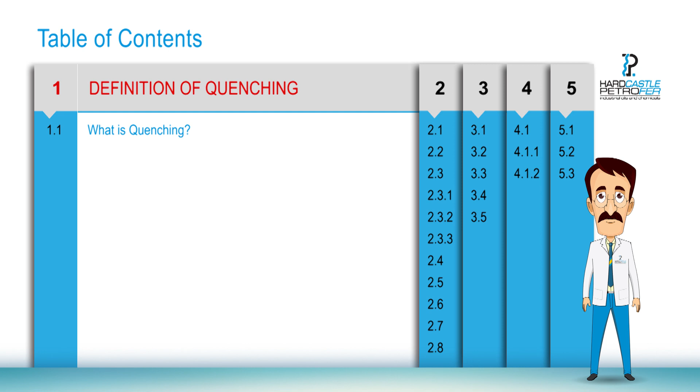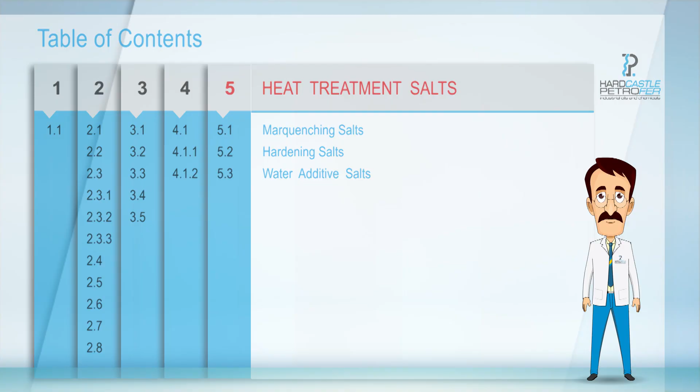Definition of quenching. General information on quenchants. Quenching oils. Water-miscible quenching media. And heat treatment salts. These are the topics we will be covering in this tutorial. Let's go ahead and get started.

Let's begin with the first topic, definition of quenching. First and foremost, let's understand what is quenching. Quenching is rapid cooling of steel from austenitizing temperature, which is around 830 degrees Celsius to 910 degrees Celsius, by immersing in a quenchant, which can be oil, polymer solution, gas, water, or even salt.

By quenching, we can increase the strength of the steel. Various properties like hardness, yield strength, impact value can be achieved by proper quenching. That was a quick brief on quenching, hope it was informative to start with. In the following topic, we will get into details about the quenchants. So let us proceed further and understand more.

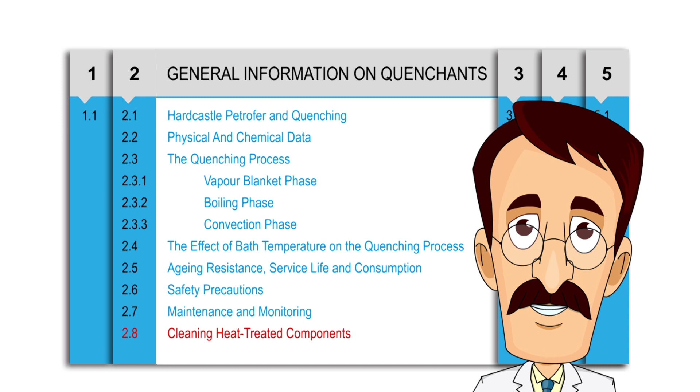Now we begin with the first subtopic under general information on quenchants, Hardcastle Petrofer and quenching. The metallurgical properties of heat-treated steel components are primarily dependent on the following factors: austenitizing conditions, hardenability of the steel, and quenching process used.

Well, to begin with austenitizing conditions, the austenitizing conditions like hardening temperature and furnace atmosphere.

Hardenability of the steel, which mainly depends on the chemistry or grade of steel and percentage of alloying elements.

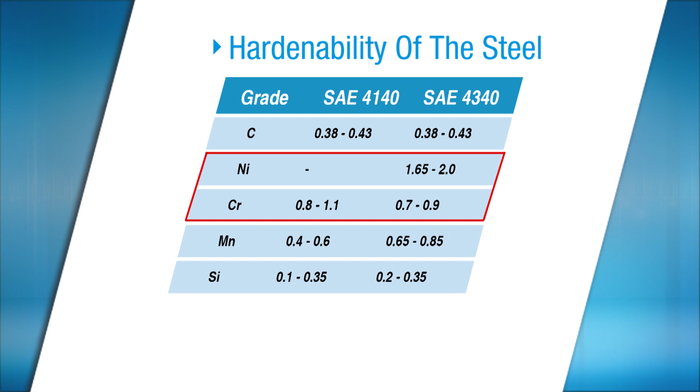Quenching process. The quenching process used, whether carburizing, through hardening, or induction hardening.

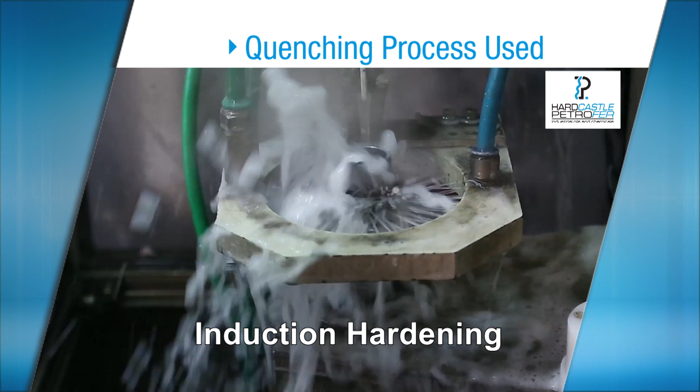Modern heat treatment processes are continually making new demands on quenching fluids, and Hardcastle Petrofer's extensive development programs ensure that our product technology is more than capable of meeting these new requirements. These programs are designed not only to improve the technical properties of our quenchants, but also to provide economic and environmental benefits.

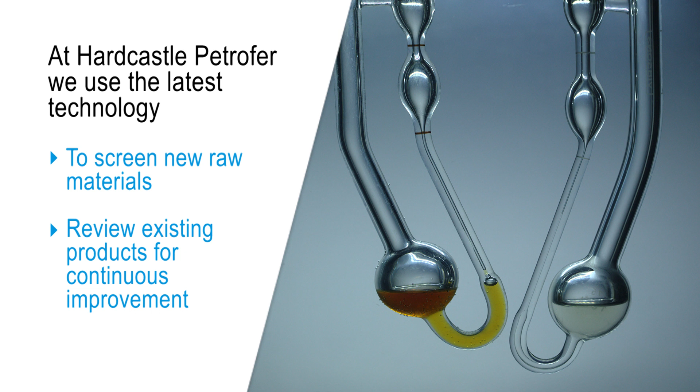At Hardcastle Petrofer, we use the latest technology. We are constantly screening new raw materials for their suitability for use in quenchants, and our existing product range is reviewed continually to ensure that the best available technology is used.

We also collaborate with equipment manufacturers and our valued customers for developing new products according to their specific needs. By using this approach, backed by our in-house capability and know-how, we are able to offer the most comprehensive range of quenchants available today.

Comprehensive range of available quenchants: medium-speed quenching oils, accelerated quenching oils, bright quenching oils, hot quenching oils, vacuum quenching oils, water-based polymer quenchants, molten salt baths, and customized quenching oils.

By having our own extensive development facilities and a complete range of products, we can ensure that the best solution is delivered to meet customers' needs. Many factors are important in choosing the most suitable quenchants.

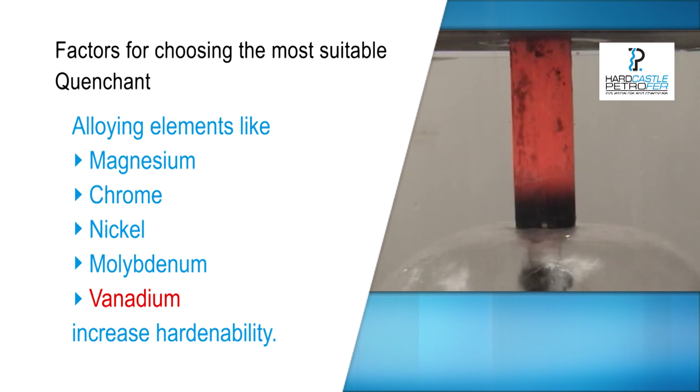Hardenability of steel refers to the capacity of hardening or hardening depth in a steel rather than the maximum attainable hardness value. Alloying elements like magnesium, chrome, nickel, molybdenum, vanadium increase hardenability. Alloy steels have significantly higher hardenability as compared to plain carbon steels. Hardenability of any steel is evaluated by the Jominy end quench test.

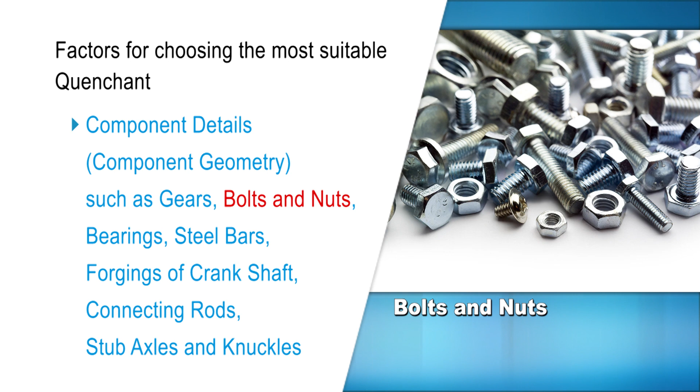Component details, that is, component shape or geometry such as gears, bolts and nuts, bearings, steel bars, forgings of crankshaft, connecting rods, stub axles and knuckles. Metallurgical properties required like hardness, case depth, yield strength, impact values, etc.

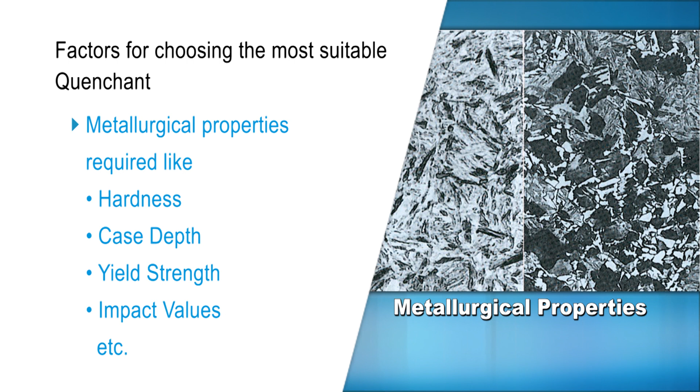Furnace equipment: bogie furnace, pit furnace, and sealed quench furnace. Post-treatment: washing machine. Environmental issues.

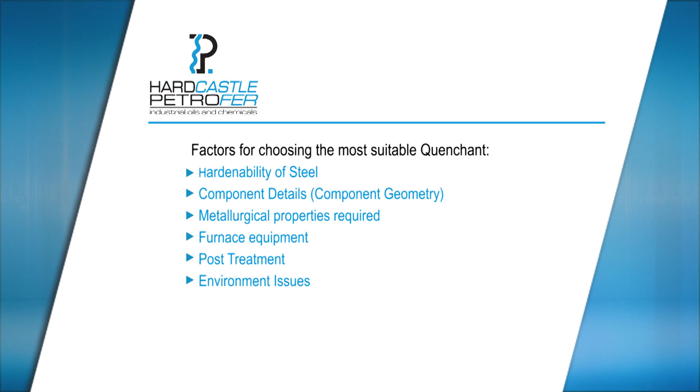As many variables often have to be considered, it is important that a comprehensive knowledge of the quenchant is available, that is: physical and chemical data, quenching properties, thermal and aging stability, and physiological and ecological properties.

Now we shall move on to discuss one of the most important aspects of selection of suitable quenchants: physical and chemical data.

Important data for identification of quenching oils typically are viscosity, flash point, and specific gravity.

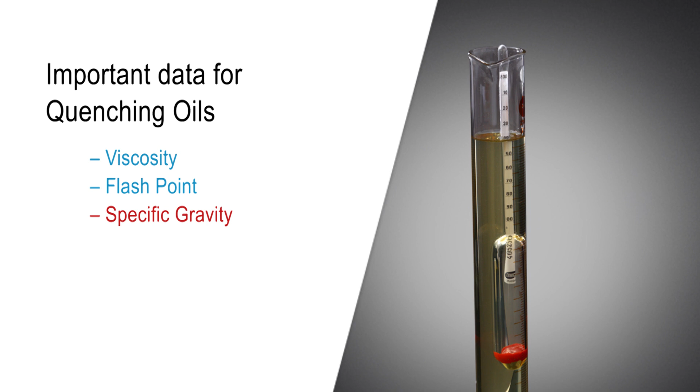Let's understand the relation of viscosity and oil bath temperature. By maintaining the correct bath temperature, one can achieve optimum working viscosity of the quenching oil. When the quenchant temperature is too low, it can result in high viscosity, reduced agitation, and increased drag-out loss. When the quenchant temperature becomes too high, it can cause unnecessary smoke formation as well as increased fire hazard.

Let's refer to the graph of viscosity versus application temperature of the quenching oils. Quenching oil temperature should ensure optimal viscosity, generally in the range of 5 to 15 centistokes. The red line indicates low viscosity accelerated quenching oil. The blue line indicates a medium fast speed quenching oil having high vaporization stability. And the yellow line indicates hot quenching oils.

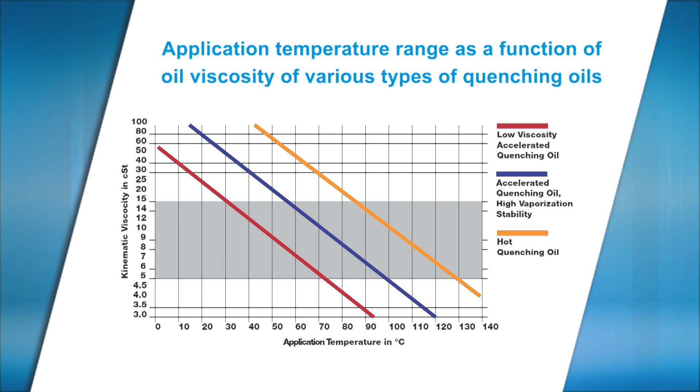Importance of product flashpoint: it limits the application temperature range. Typically, the application temperature upper limit should be approximately 60 degrees Celsius below the oil's flashpoint.

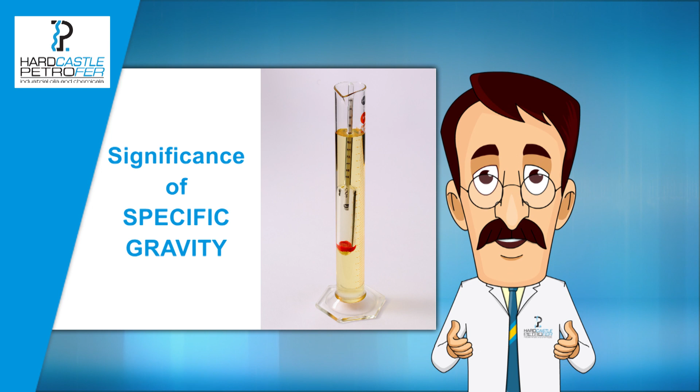Specific gravity of a pure mineral oil can give an indication of its origin. However, it can be significantly modified by additives, and therefore the quality of a quenching oil cannot be determined on the basis of its specific gravity.

Let's catch up on the next topic, the quenching process.

The quenching process: a quenchant is characterized primarily by its quenching properties, and these are difficult to describe in words. Descriptions such as severe quench or mild quench are of little use in technological era.

The quenching process or cooling rates can, however, be studied using test probes such as nickel and nickel alloy probes using cylinders 12.5 mm diameter as per ISO 9950, or alternatively steel probes 3 to 80 mm diameter as per Meinhardt method, or a silver ball 20 mm diameter as per MPI silver ball method, or silver cylinders 8 or 16 mm diameter as per SETIM method.

We use the IVF quenchometer for cooling curve analysis, which has an Inconel probe of 12.5 mm diameter. Usually, the cooling effect of a quenchant is shown by charting temperature versus time, or the rate of cooling versus temperature.

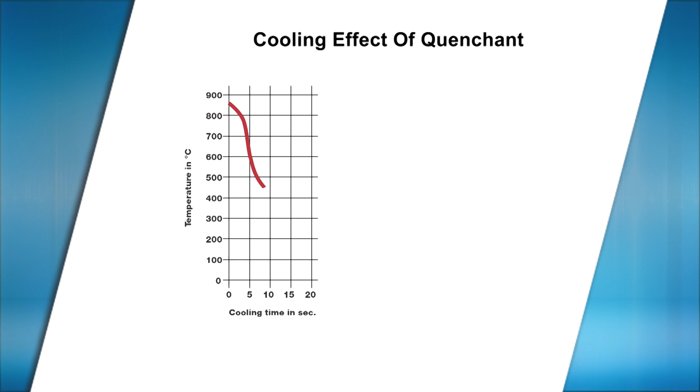We now move on to the study of the three phases of quenching. A vapor blanket is formed on the component immediately after immersion in the quenchant. This vapor layer acts as an insulator because of its low thermal conductivity, and therefore the cooling rate in this phase is low. The duration of this phase depends essentially upon the quenchant's composition.

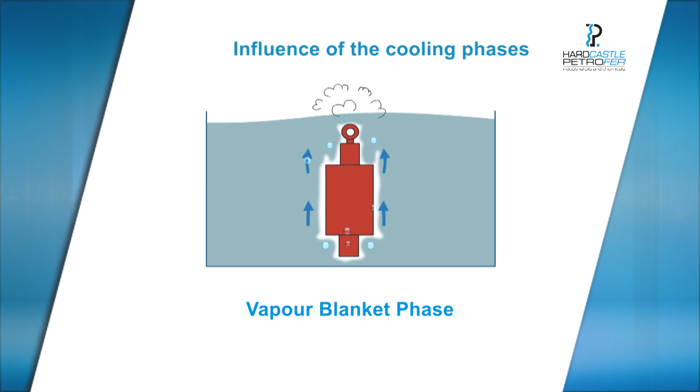Our accelerated quenching oils have a very short vapor blanket phase, and in this respect are superior to most other quenching oils. A short vapor blanket phase is not only necessary to avoid undesirable pre-transformation microstructures, but it also ensures a steady lowering of temperature on the entire surface of the component, thus minimizing thermal stress and distortion.

After a period of time, depending upon the quenchant and component geometry, the vapor blanket starts to break down and the boiling phase begins. Heat is conducted away at an increasing rate by evaporation of the quenchant at the component surface.

The rate of cooling reaches its maximum, and as the surface temperature falls, boiling becomes weaker and finally ceases.

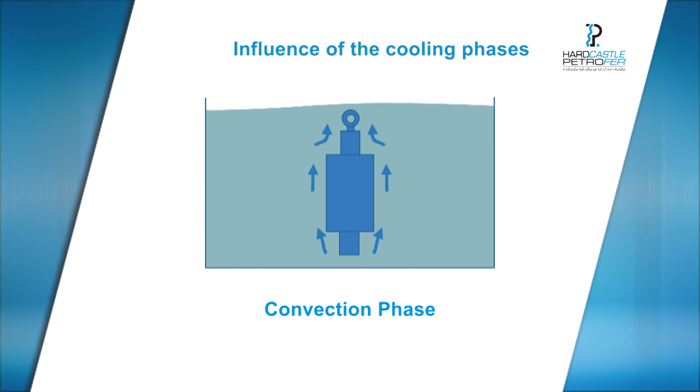In the last phase of cooling, heat is conducted away only by convection. Consequently, cooling in this phase can be significantly affected by circulation of the quenchant. A high degree of cooling in the convection phase will result in deeper hardening of the component.

For evaluation of the cooling curves, the following points are therefore important: duration of the vapor blanket phase, temperature range of the boiling phase, the cooling rate during the convection phase, and the temperature at which it begins.

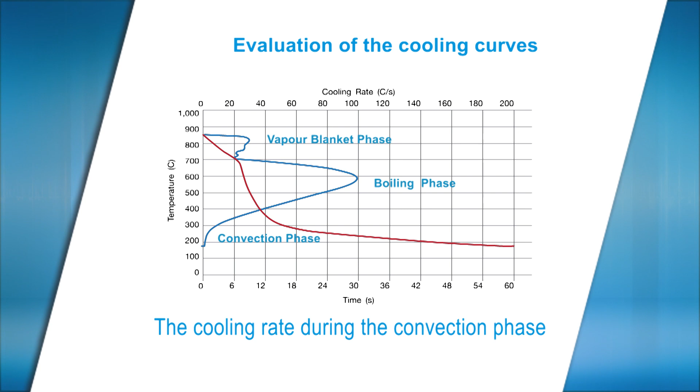A shorter vapor phase gives fast and homogeneous cooling of the entire surface of the workpiece. Wide boiling phase gives good heat extraction in large diameter components. Cooling in the convection phase can be influenced by circulation of the quenchants.

Significance of maximum cooling rate: the maximum cooling rate can be used to compare various quenchants. The relation of the steep slope of the temperature versus time curve, and its position in relation to the time-temperature transformation diagram, is of utmost importance.

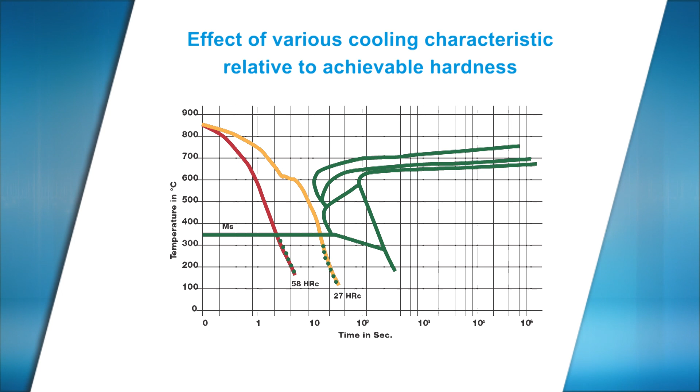In the following topic, we will learn the effect of bath temperature on the quenching process.

However, aqueous or water-based quenchants are affected significantly by bath temperature. This is caused by the much smaller difference between the working temperature range and the boiling range of aqueous solutions in comparison with oils. Water boils at about 100 degrees Celsius, whereas oils boil from about 300 degrees Celsius upward. Consequently, when aqueous media are being used, bath temperatures must be kept constant within relatively narrow limits.

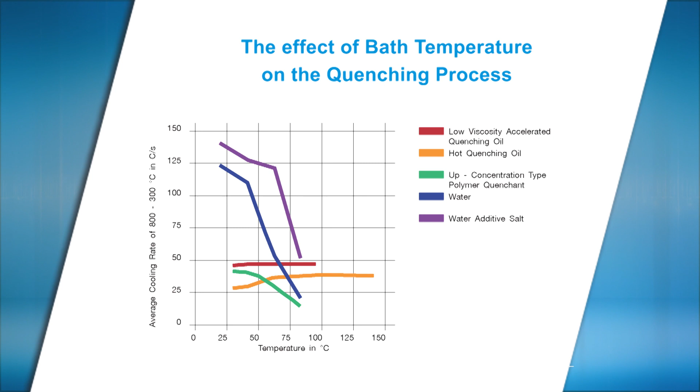The graph shows the influence of bath temperature on the quenching performance of several quenching fluids. The average cooling rate of water, additive salt in water, and up-concentration polymer quenchant reduces as bath temperature increases. Whereas, in the case of low-viscosity accelerated quenching oil and hot quenching oil, the average cooling rate remains almost the same throughout its operating temperature range.

Let us once again review the influence of bath temperature on the quenching properties. For quenching oils, the bath temperature has insignificant influence when operated within its recommended viscosity range. For polymer solutions, bath temperatures have a considerable impact on quenching properties. This can be used advantageously when quenching tool or die steels, and slow cooling is required. While quenching in water, the temperature of water bath has a distinct effect on the quenching characteristics.

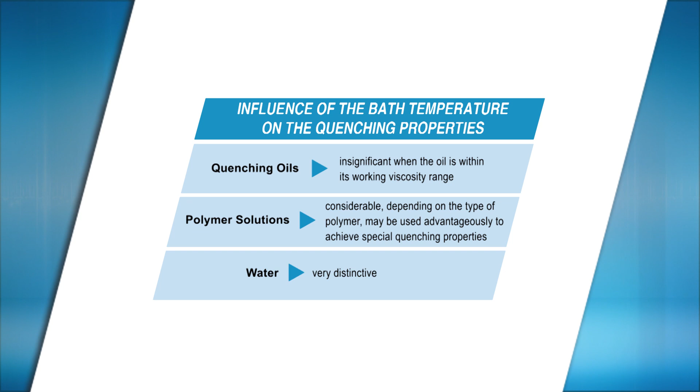The control of bath temperature plays a significant role in ensuring uniform quenching characteristics throughout the quenching cycle. For control of the bath temperature, we can consider heat balance calculation as shown, where the formula indicates heat input from the metal is transferred to the quenchant. It can be used to design the cooling arrangement required to maintain a constant temperature.

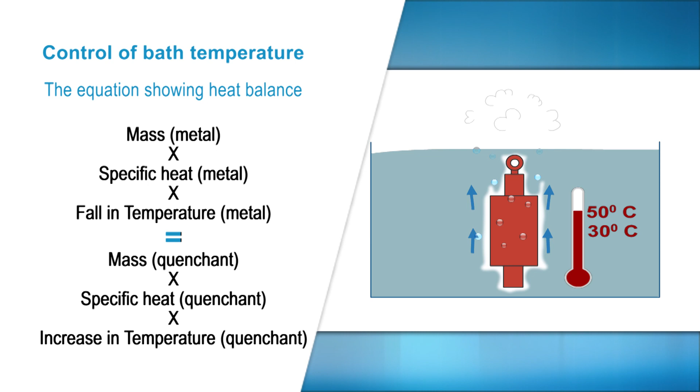The temperature of the quenching oil must be maintained within the recommended range, as it can significantly influence the life of the oil, drag-out loss, and distortion of components. Various types of heat exchangers like shell and tube, plate type, forced air-cooled can be used for control of temperature.

Now let's move on to a discussion on the aging resistance, service life, and consumption of quenchants in the process.

Resistance to evaporation has a considerable effect on consumption and thus on oil bath economics. Experience has shown that on batch quenching, probably more oil is lost through evaporation than through drag out by the components.

Aging resistance is, however, of the greatest importance in determining the economics of any oil bath. Oils having poor oxidation resistance will form a sludge after a short period in use, and this normally results in deposits in the cooler, the coldest place in the quenching bath. Ultimately, discoloration appears on the surface of the treated components, which is either difficult or impossible to remove. At this stage, replacement of the oils is unavoidable.

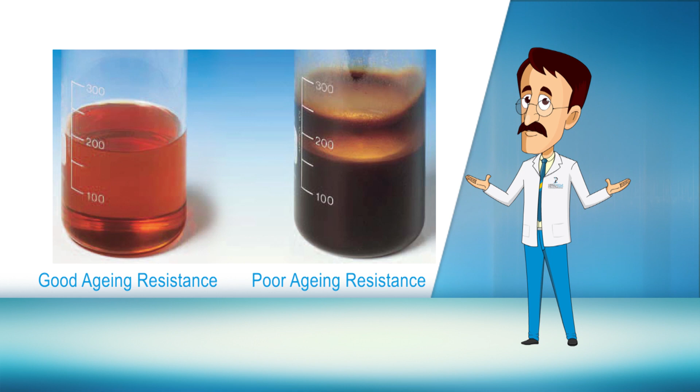Now, let us discuss the advantages of using a quenchant having stable parameters. The high evaporation stability of oil helps in reduction of smoke and also the consumption due to lower evaporation. The good oxidation stability of the oil provides better service life and helps reduce sludge formation. The oils having high thermal stability significantly reduce smoke and help retain typical quenching properties for a longer period.

Several important points need to be observed when using an oil bath in order to achieve the optimum working conditions. In order to keep the thermal loading within limits and also to avoid severe variations in the working temperature of the bath, a relationship between the weight of the batch or hourly throughput of the furnace and the volume of quenchant must be maintained.

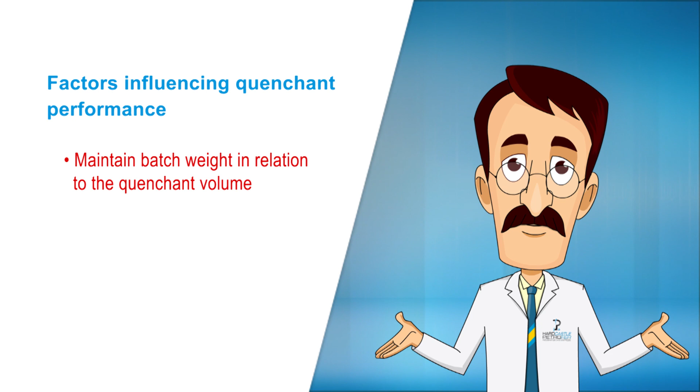Consequently, the following values can be used as a guide to the relationship between the weight of quenching oil and the gross weight of the batch to be quenched.

Open oil baths 10:1. Sealed furnaces 10:1 to 7:1. Hot quenching oils used at their highest temperatures 10:1 to 15:1.

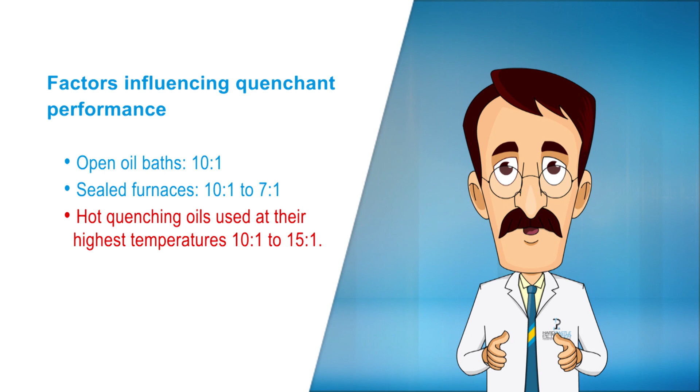These values can also be used where quenching of small batches at short intervals takes place, and the hourly throughput of steel is then used in the calculation.

Now we see the effect of loading pattern. This relationship depends upon the conditions of use of the oil and upon the size of the components. Larger components, which take longer to cool, cause a lower thermal loading to the oil bath than tightly packed batches of small components which give off their heat rapidly.

The cooling and heating elements of the heat exchanger should not be made of copper, as this acts as a catalyst in the oxidation of mineral oil products.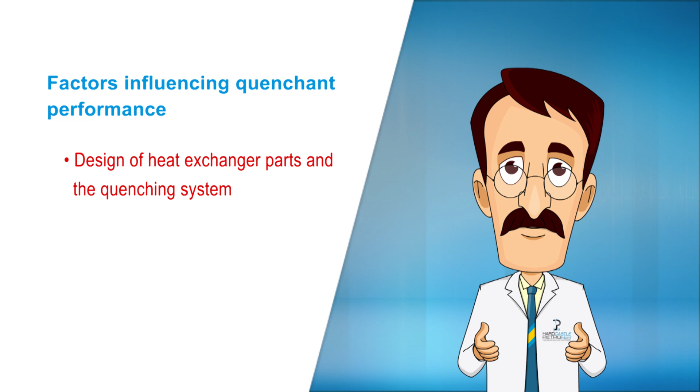The level of agitation in the system must not be excessive, such that air is drawn into the oil. This condition will result in foaming and increased oxidation of the oil.

The heating area loading of the heating elements should be limited to about 1 watt per centimeter square. If a higher loading is used, good movement of oil in the area of the elements must be maintained to avoid overheating.

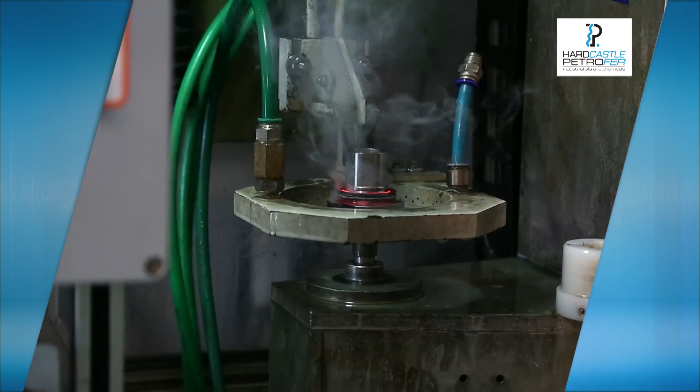The life of water-miscible quenchants is usually limited by several factors. In the case of induction hardening operations, the solution has to be replaced after periodic intervals due to the effects of contamination from previous processes.

The thermal loading can also take its toll in the long term. In view of this, and the need to control the concentration of solution, monitoring is required for polymer quenchant solutions.

Now we need to deal with the most important aspect, safety precautions. Let's have a brief discussion on it.

While operating quenching baths with oils, we need to exercise certain safety precautions to avoid quench fires. Ingress of water into the quenching oil bath, typically through a leaking cooler or as a condensate, creates a special hazard. As little as 0.1 to 0.3% water contamination can considerably increase the fire hazard, as well as significantly change the quenching characteristics of the oil.

Quenching oils are combustible liquids, and in the quenching process the temperature of the components being treated is usually well above the flash point of the oil. Simple precautions are required so that there are no fire hazards in practice.

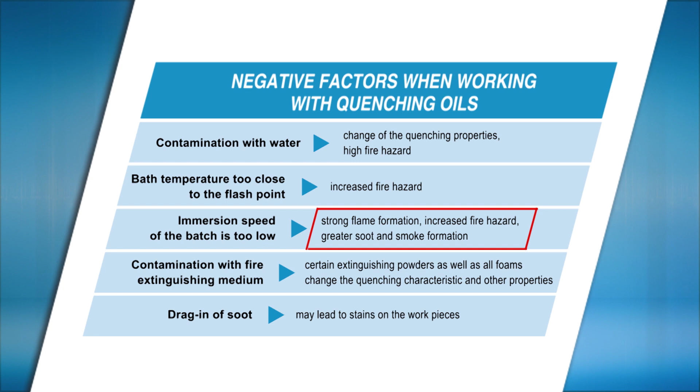Contamination with fire extinguisher can change the quenching characteristics and other properties of the quenching oils. Drag-in of soot in the quenching oil can lead to stains on the component surface.

Now let's take a look at maintenance and monitoring.

Aqueous quenchants must be carefully monitored with respect to both the operating temperature and the concentration of the solution. Relevant instructions have to be carefully followed to ensure successful results.

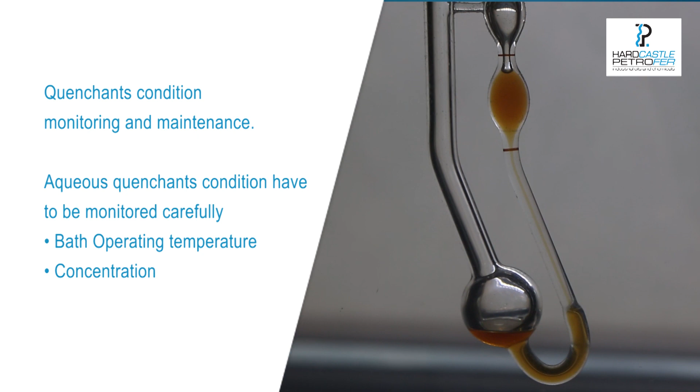Under normal operating conditions, quenching oils do not require regular monitoring. Attention should, however, be paid to ensure the working temperature of the oil is maintained and that the temperature never exceeds one which is at least 60 degrees Celsius below the oil's flash point.

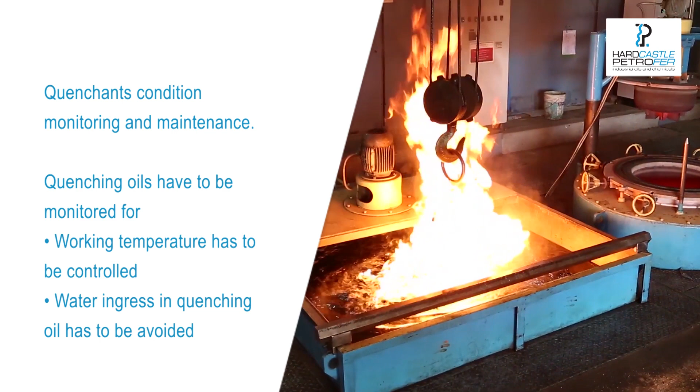The oil should also be regularly checked for water contamination. We recommend checking oil baths at least annually, and water-miscible quenchants at shorter intervals depending upon the operating conditions.

Well, let me now brief you on cleaning heat-treated components.

When water-miscible quenchants are used, post-cleaning of the heat-treated components is often unnecessary, even before tempering. However, when high concentrations are being used, rinsing of the components is recommended.

Hardcastle Petrofer's quenching oils will produce hardened components with a bright finish, provided there was no prior surface oxidation. The components are suitable for further treatment, such as electroplating, without problems. Oil residues do not burn into the surface of the metal and therefore can be easily removed.

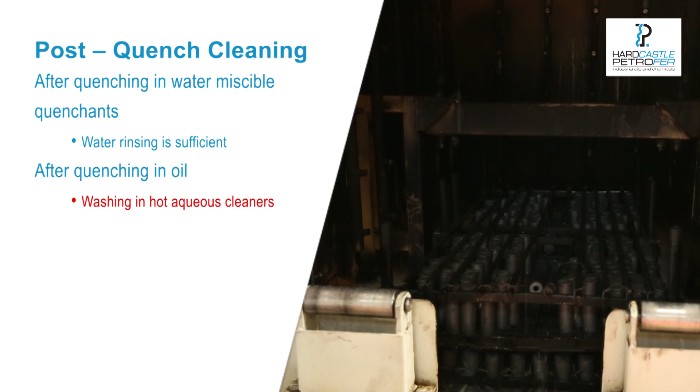Removal of quenching oil generally requires the use of hot aqueous cleaners or the use of water-washable quenching oil. Degreasing with solvents in a soak tank or in vapor is also possible.

The hot cleaner chosen should be formulated to provide rapid release of the quenching oil so that it can be easily removed from the wash tank. Hardcastle Petrofer has developed High Clean for this purpose, thus enabling wash water to be used for longer periods with savings in disposal costs.

For removal of separated oil, the use of weir systems or oil skimmers is recommended. Even emulsions from water-washable quenching oils are destabilized when small quantities of High Clean, 0.5 to 2%, are added to the washing water.

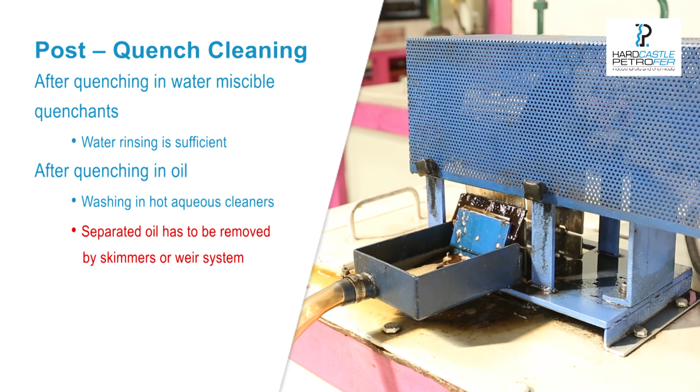Centrifuges also enable very good oil separation from the wash and can be used for both conventional and water-washable quenching oils.

It is essential to exercise certain precautions to avoid negative influences in the cleaning process. When agitation is inadequate, it may influence the cleaning of parts, particularly when the parts to be cleaned are immersed in the bath in a tightly packed condition.

Care has to be taken to ensure oil residues on the parts are properly cleaned by the use of suitable cleaner, as otherwise these residues can cause smoke formation during subsequent tempering processes.

The health of the cleaner bath is required to be ensured by proper skimming, so that the parts after cleaning do not get coated again with the oil layer floating on top of the cleaner bath.

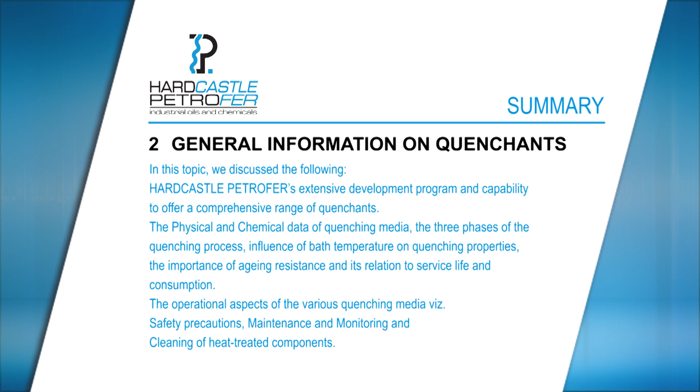Well, we come to the end of general information on quenchants. Hope it was an informative session.

We are now going to begin with the third chapter, Quenching Oils.

In this chapter, we will discuss our range of quenching oils, which includes medium-speed quenching oils, medium-fast-speed quenching oils, fast-speed quenching oils, mar-quenching oils, and special quenching oils. Let's proceed and discuss each category of the quenching oils listed.

Let's continue the discussions on the medium-speed quenching oils. Medium-speed quenching oils are recommended for general-purpose applications.

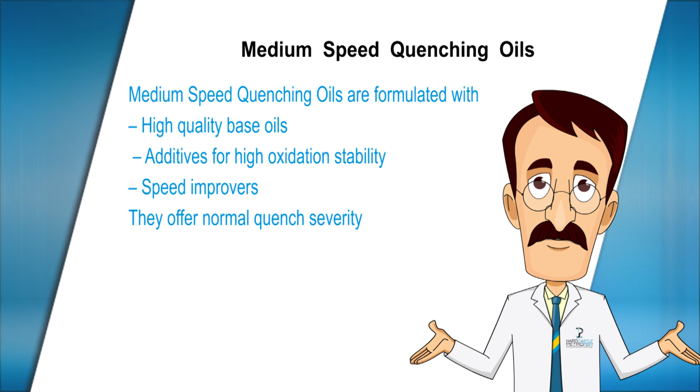These oils are formulated with high-quality base oils, additives for high oxidation stability, and speed improvers. They offer normal quench severity, which makes them suitable for hardening of low and high alloy steel grades. They are normally used in open quench tanks due to their higher oxidation stability characteristics.

We can summarize the typical applications for use of quenching oils as hardening of automotive forgings, hardening of heavy forgings, hardening of bearing races, quench hardening of tool steels, hardening of martensitic grades of stainless steel, and many such general-purpose quenching applications.

We now move on to the popular products from Hardcastle Petrofer's range of quenching oils. The products listed in the table are cold quenching oils, where the oil temperature is normally maintained in the range of 30 to 80 degrees Celsius.

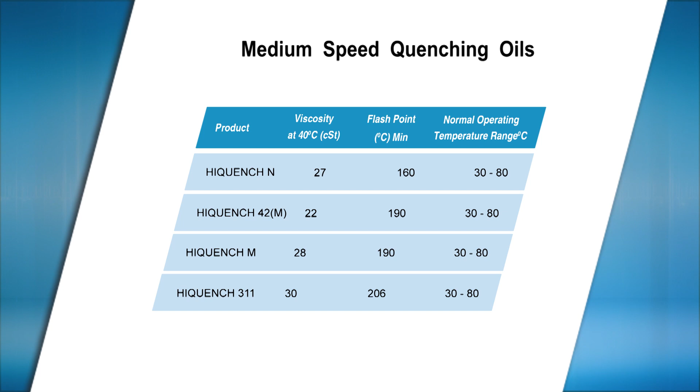These products are mainly identified as HIQUENCH N, HIQUENCH 42(M), HIQUENCH M, HIQUENCH 311 based on their kinematic viscosity, and Flashpoint measured by Cleveland Open Cup method.

Now let's move on to discussions on the medium fast speed quenching oils. Medium fast speed quenching oils are formulated to enhance quenching performance. These oils are used mainly in hardening of plain carbon and alloyed steels.

These oils are normally used in continuous furnaces and sealed quench furnaces. As the category name shows, the quenching speed of these oils is in the medium range, providing a wide scope of the applications across the various steel grades, parts geometry, quenching systems involved, etc.

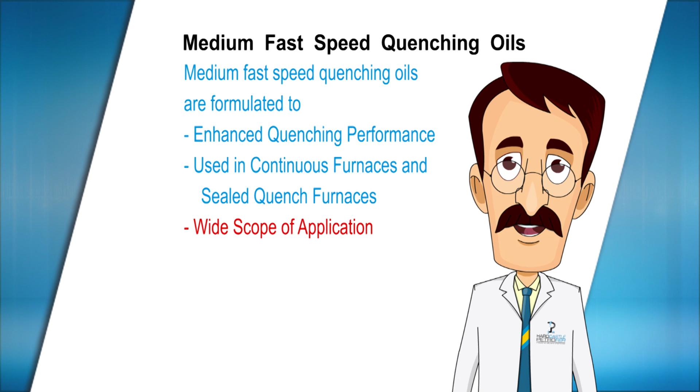A few typical examples of wide range of possible applications are shown in this slide. They are hardening of high tensile bolts, screws, nuts, washers, etc., hardening of hand tools, heat treatment of steel bars and sections,

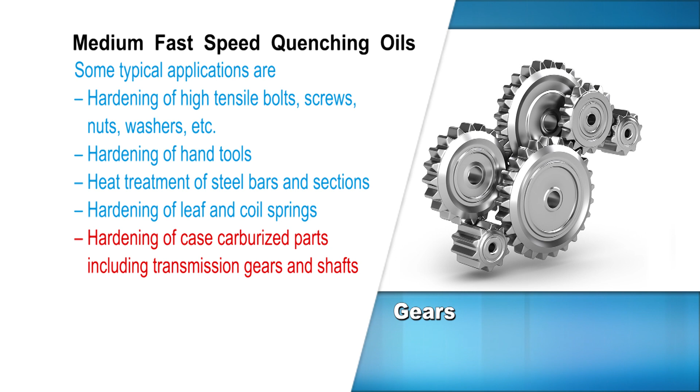hardening of leaf and coil springs, hardening of case carburized parts including transmission gears and shafts, hardening of bearing races, hardening of automobile forgings.

From the vast range of medium-fast quenching oils, three popular products, namely HIQUENCH MF, HIQUENCH MF(A), and HIQUENCH MF PLUS, having different typical viscosity at 40 degrees Celsius and flash points, are shown. The temperature of these oils is maintained in the range of 30 to 80 degrees Celsius.

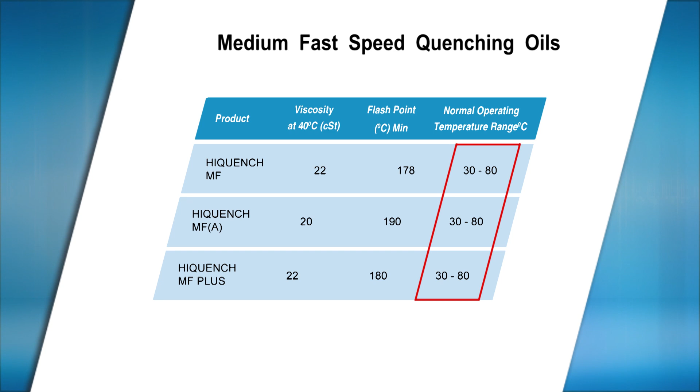To know more about quenching oils, let us learn about the fast-speed quenching oils. Fast-speed quenching oils have been especially formulated for use in sealed quench furnaces. They exhibit short vapor phase and high quench severity.

Hence, the quenched parts in the batch are uniformly and rapidly cooled. These oils are therefore used successfully for low distortion hardening of large diameter and heavy transmission gears and parts where high core hardness is required, or for hardening of components of low or lean alloy steels.

By virtue of the short vapor phase and high quenching speeds exhibited by fast-speed oils, these products are extensively used for cold quenching applications, mostly in furnaces where controlled atmosphere is maintained in order to achieve stable performance over a long period.

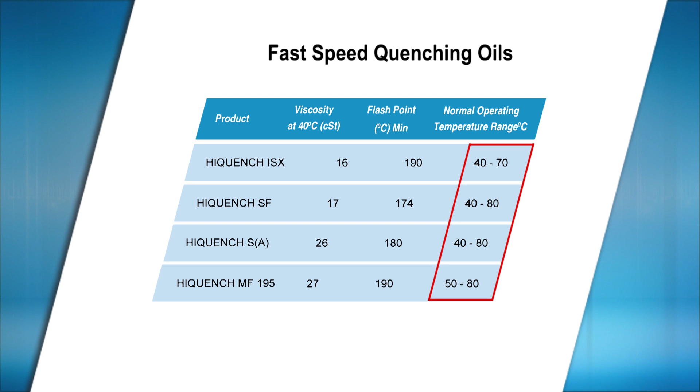The table shows some of the important fast-speed quenching oils widely preferred by many of Hardcastle Petrofer's customers. The wide range of viscosities offers customers choice to suit their demanding performance requirements. The recommended oil temperatures are in the range of 40 to 80 degrees Celsius.

The next in line is the information on the mar-quenching oils. Mar-quenching oils are popularly known as hot quenching oils.

Following the development of new additives, these oils can now offer better cooling properties and high oxidation resistance at higher operating temperatures. This allows new standards to be set for the operation of hot oil with respect to quenching speed, distortion control, service life.

Optimum hardness and lowest distortion can be achieved because of the extremely short vapor blanket phase and the slow cooling rate during Martensite transformation.

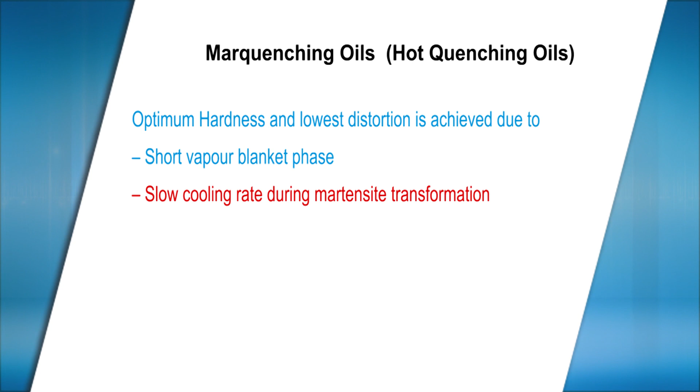High-quench MT780 has a typical viscosity of 78 centistokes and can be used in the temperature range of 60 to 150 degrees Celsius. High-quench MT1115 has been designed for operating under difficult application conditions, including open quench tanks. It has a typical viscosity of 112 centistokes and can be operated in the range of 80 to 180 degrees Celsius.

High-quench MT400 is preferred where the application calls for very low viscosity of the product. This product, having 40 centistokes viscosity, can be used in a vast operating range of 50 to 150 degrees Celsius. High-quench MT1800 is a popular product for open tank quench applications and has a viscosity of 175 centistokes and can be operated in the range of 120 to 190 degrees Celsius under specified operating conditions.

The product High-quench MT500HC has a viscosity of 50 centistokes and can be used in an operating temperature range of 50 to 100 degrees Celsius. High-quench MT780 has a typical viscosity of 78 centistokes and can operate in the temperature range of 60 to 150 degrees Celsius.

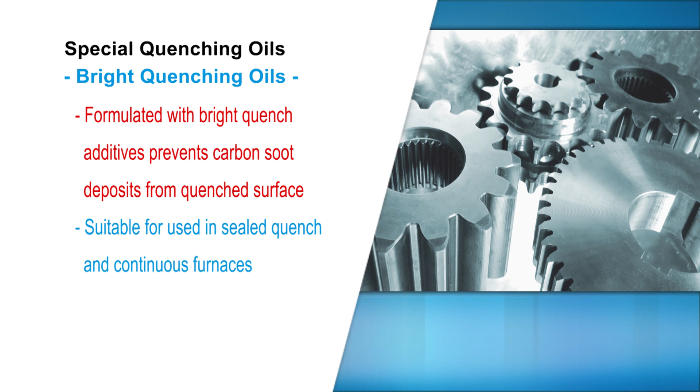Our medium-speed quenching oils and hot quenching oils are also available with bright quench additives, which improve the surface finish of quenched components by preventing the soot deposits from sticking on the surface of the quenched parts. Typical applications are carburized components such as automobile gears and shafts in sealed quench furnaces, continuous furnaces for bearing races, fasteners.

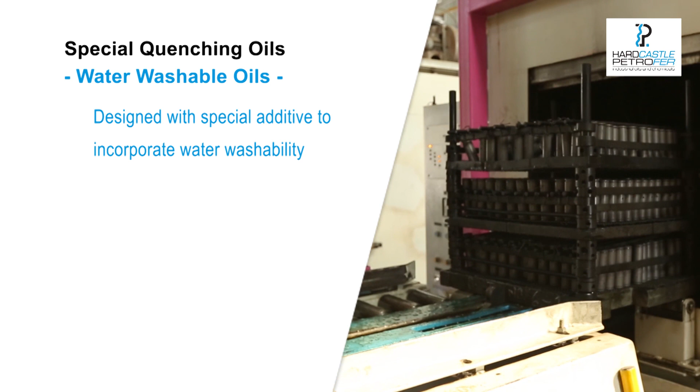Certain applications have specific needs for quenching oils having inbuilt capability to be washed off by use of plain water after quenching. These quenching oils contain special additives to provide this feature. Hardcastle Petrofer has developed tempering oils, which are used in applications where oil is used as tempering medium instead of air in order to achieve desired metallurgical properties of the quenched parts. They are also used for parts to be preheated in oil medium before they are shrink-fitted.

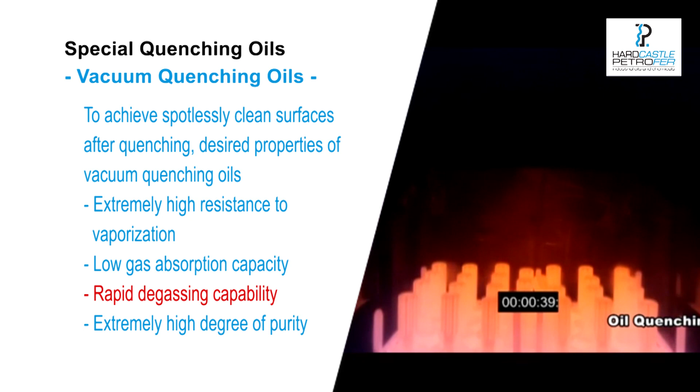Hardcastle Petrofer also has an established range of vacuum quenching oils which have been developed with the following special properties in order to achieve spotlessly clean surfaces. They offer extremely high resistance to vaporization, low gas absorption capacity, rapid degassing capability, extremely high degree of purity.

So friends, we have come to the end of the chapter on quenching oils. Hopefully, this session was equally informative as the previous one. Going forward, let's proceed with the fourth chapter, water-miscible quenching media, also known as polymer quenchants. In this chapter, we will discuss the following: development and usage of polymer quenchants and the two types of polymer quenchants, inverse solubility polymer quenchants, up concentration polymer quenchants. Let's proceed and discuss.

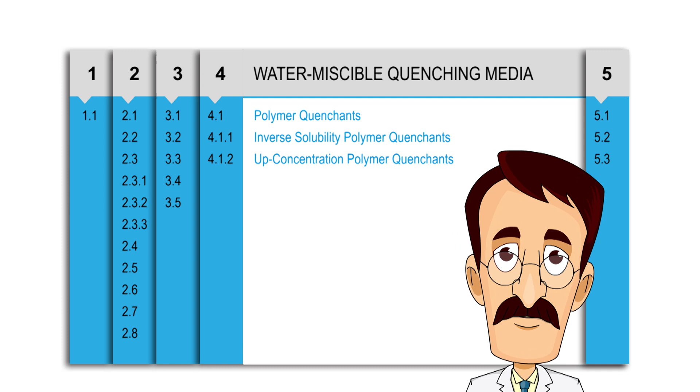We begin with polymer quenchants. We shall cover the following: development of polymer quenchants, advantages over emulsion, substitution to oil quenching, comparison to oil cooling rates, incombustibility.

As has been shown, quenching oils cover a wide range of cooling performance, yet there is still a significant gap between the maximum achievable cooling rate of a low viscosity accelerated oil and that achievable with ordinary cold water. Water-miscible quenchants, which fill this gap, are thus an ideal complement to the quenching oil range. Heat treatment operations can be carried out with these water-based quenchants, which would either be impossible or extremely difficult with oil. This particularly relates to spray quenching in induction and flame hardening processes, where a high degree of fire risk exists when using oil.

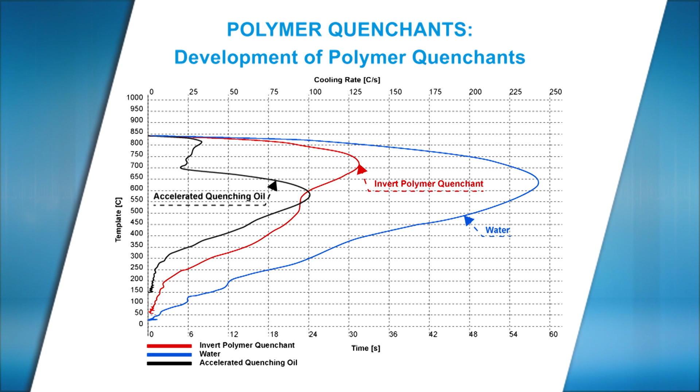Emulsions have historically been employed in these applications instead of oil, but unfortunately, they do not give the low cooling rates in the temperature range for martensite transformation necessary to reduce or eliminate the danger of cracking. These cooling characteristics can only be achieved with polymer quenchants.

As a result of our continuous development programs, we are today able to offer users a complete range of water-miscible quenchants which successfully covers the whole spectrum from oil to water quenching. Accelerated quenching oils can already be replaced in a wide range of applications as polymer solutions are available, which give comparable cooling characteristics.

These solutions are therefore suitable for hardening alloyed quench and tempering steels and some tool steels, as well as for quenching components directly from forging.

Water-miscible quenching media are today used to a high extent as a substitute for quenching oils. It must be realized that these products contain from 60 to 98% of water in the ready-to-use condition, the level depending on the concentration used for a given application. Due to high water content in polymer quenchant solutions, the cooling rates in the boiling phase are usually higher than the cooling rates in quenching oils.

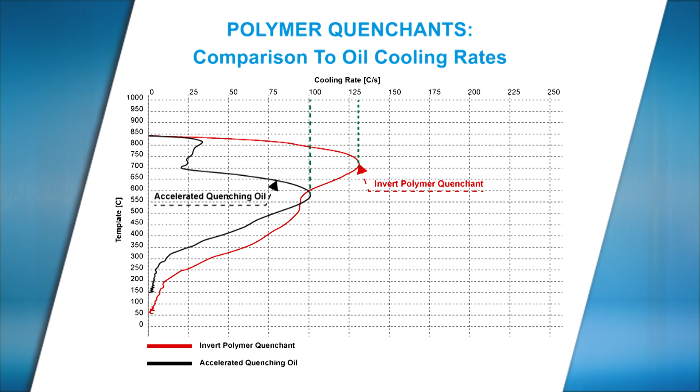All water-miscible quenchants are of course incombustible and, in contrast to oil quenching, help avoid the risk from fume and fire. This is particularly useful when hardening forged parts directly from forging temperature and for interrupted quenching, that is, time quenching of components.

Hardcastle Petrofer has rich experience of formulating and manufacturing polymer quenchants. The wide range of polymer quenchants available provide users the choice of options to suit their performance requirements. These polymer quenchants can be used in a wide range of concentrations in water. This property provides users with the flexibility to use the same polymer for quenching a variety of steel grades and also for use in induction hardening as well as tank quenching applications. By careful selection of high-quality raw materials, efficient performance is ensured.

Hardcastle Petrofer polymer quenchants exhibit a very high level of thermal stability, thus providing consistent performance over a long period. High-quality corrosion inhibitors, biocides, and defoamers help effectively control and maintain the quality of the polymer solution in use.

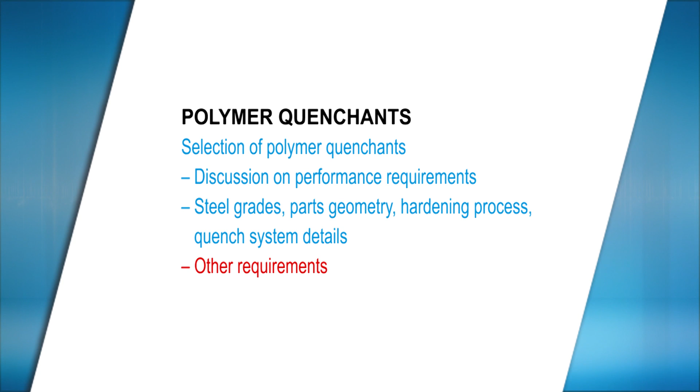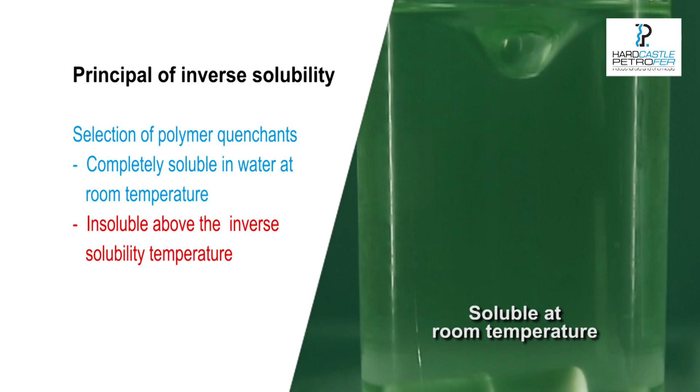Inverse solubility polymers exhibit inverse solubility in water. That is, they are soluble in water at room temperature, but insoluble above the inverse solubility temperature, normally 65 to 70 degrees Celsius. These polymer solutions reduce the quenching effect of water by virtue of the polymer in solution becoming insoluble at the inverse solubility temperature during the quenching process and plating out onto the hot surface of the component. The thickness of the insulating film formed varies with the concentration of the polymer in the original solution.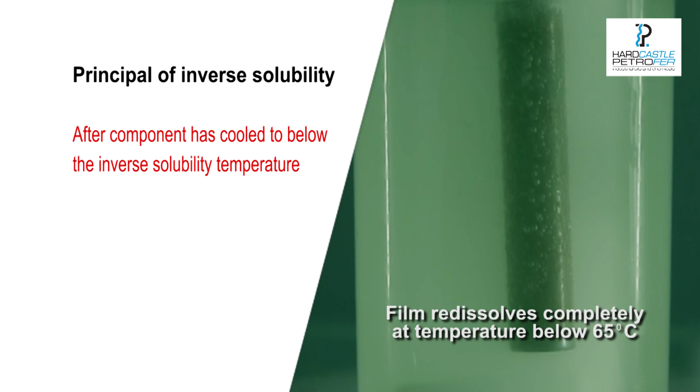When the component cools to below the inverse solubility temperature of the polymer solution, the film starts to redissolve completely, thus ensuring the drag out of the polymer remains low. Hence, these polymer quenching solutions are very economical in use.

Inverse solubility polymer quenchants are used in quenching baths, mainly for hardening low alloy steel grades and quench and tempering steels, which are difficult to harden with quenching oil, but which are prone to cracking with water quenching. They can also be used for induction and flame hardening processes.

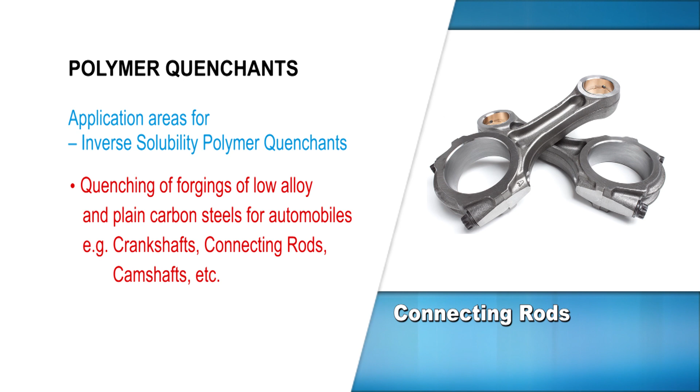Inverse solubility polymer quenchants can be used for a wide range of applications: quenching of forgings of low alloy and plain carbon steels for automobiles, for example crankshafts, connecting rods, camshafts, etc.; quenching of steel castings; quenching of bars and sections of low alloy and carbon steels; hardening of hand tools, spanners, wrenches, tongs; hardening of high-pressure cylinders and seamless tubes; hardening of carburized or carbonitrided small parts in continuous furnaces, chain and bicycle components.

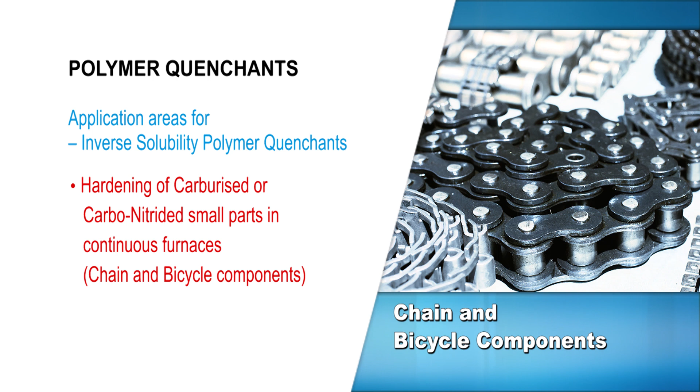Induction hardening of crankshafts, camshafts, gears, splines on shafts, slewing rings, axle shafts, velocity joints, etc.

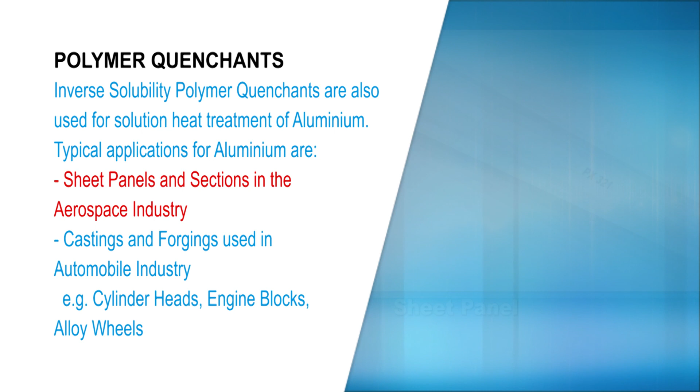Inverse solubility polymer quenchants are also used for solution heat treatment of aluminium. Typical applications for aluminium are sheet panels and sections in the aerospace industry, and castings and forgings used in the automobile industry, for example cylinder heads, engine blocks, alloy wheels.

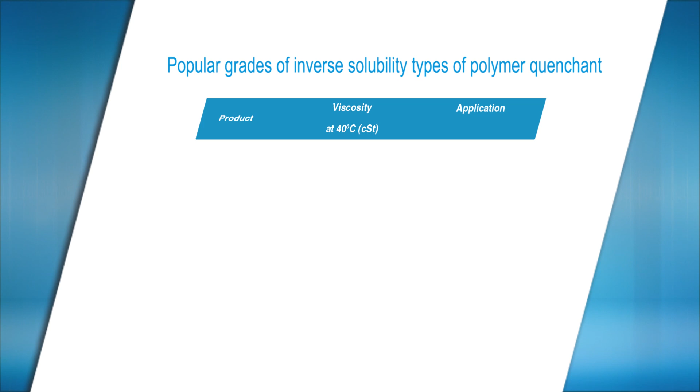Hardcastle Petrofer has a major share of business in India for their inverse solubility type polymer quenchants. These quenchants are classified according to their respective kinematic viscosity at 40 degrees Celsius. We generally recommend the application temperature in the range of 25 to 55 degrees Celsius.

Hardcastle Petrofer also has special grades of polymer quenchants which are used for solution heat treatment of aluminium parts, such as sheet panels and airframe sections in the aerospace industry, and for castings and forgings of parts such as cylinder heads, engine blocks, alloy wheels, etc., used in the automotive industry.

The new generation up-concentration type polymer quenchants provide an even more significant reduction compared to inverse solubility polymer quenchants in quenching speed when added to water at various proportions.

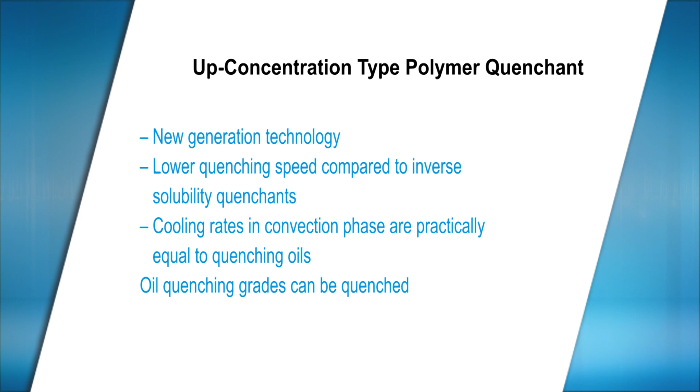In the beginning of the cooling process, a thin polymer film ensures uniform collapse of the vapor blanket and the start of the boiling phase. With further cooling, an insulating film develops, and the thickness of the film varies with concentration. Its insulating effect ensures a controlled heat flow from the component into the quenchant.

These polymer quenchants are used to treat steels of higher hardenability, for example, for quenching alloyed tempering and case hardening steels, and for hardening tool steels. Interrupted quenching of components is possible at any desired surface temperature.

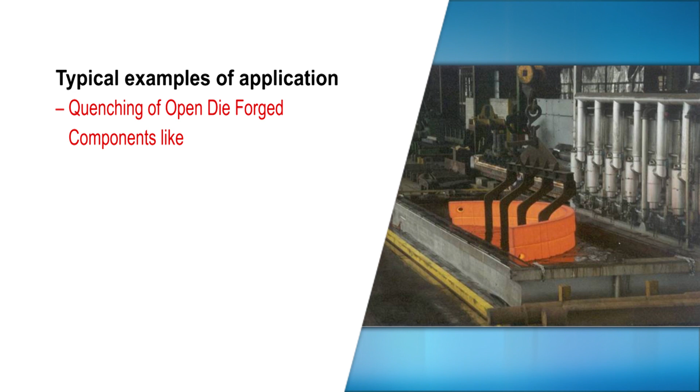These polymer quenchants can be used for a wide range of applications: quenching of open die-forged components like turbine shafts, seamless rolled rings, valve bodies; quenching of bars, coils of martensitic stainless steels; quenching of die steels, tool steels.

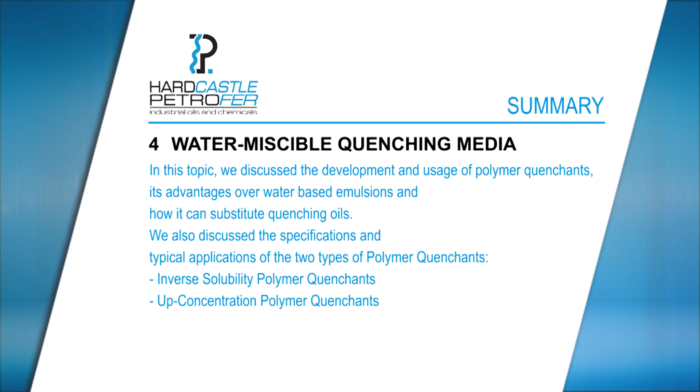Well, we come to the end of the 4th chapter. I hope you are going to take advantage of what you have learned in this chapter. Let's move on to the next chapter.

Going ahead with the tutorials, let's proceed with the last chapter, Heat Treatment Salts. We will now cover the final topic of discussion, heat treatment salts. These are broadly classified based on their usage, such as austenizing, quenching, and tempering.

We can offer the following salts: marquenching salts, hardening salts, water additive salts. We will now take up the first type, marquenching salts.

The various types of marquenching salts available are classified as per their melting point and thereby their lowest application temperature. Generally, marquenching salts are used between 200 to 350 degrees Celsius. The maximum possible bath temperature for these products is 550 degrees Celsius. However, at higher temperature, thermal decomposition of the salt increases rapidly.

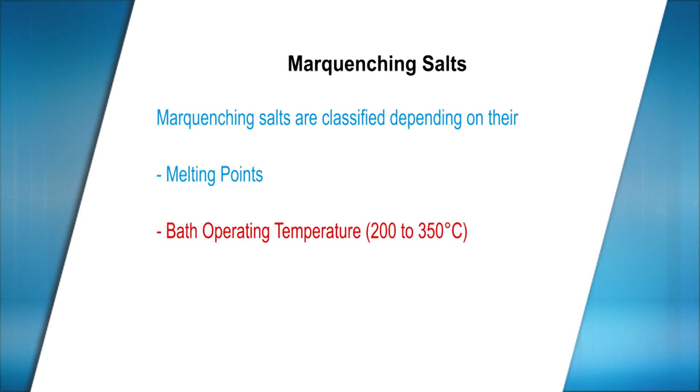The quenching rate of these salts normally reduces due to contaminants like carryover from hardening or carburizing salt baths, scales, or carbonate formation at higher temperatures. These contaminants have to be removed by desludging the bath periodically. However, the quenching action can be enhanced by adding water in quantities up to 2%.

Our range of marquenching salts are High Salt 1150. It is recommended for applications like marquenching of critical components as well as for austempering process. For austempering application specifically, we recommend the use of High Salt 1220, which has a higher melting point compared to High Salt 1150. High Salt 2460 is used for quenching of high-speed steel grades at higher temperatures.

Taking forth the discussion, let's discuss the next type of salts, hardening salts. These are normally used for heating the components to austenizing or hardening temperature. The salts can be selected depending on the operating temperature range required, normally from 500 to 1300 degrees Celsius.

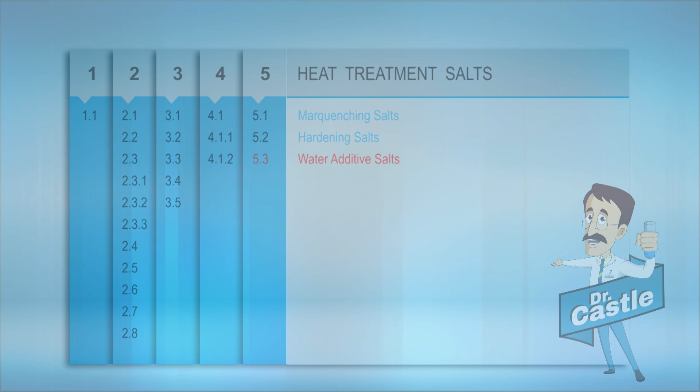We will now discuss the last subtopic, water additive salts. These are normally mixed with water to increase the quench severity. Water additive salts are used for hardening of plain carbon or free machinable carbon steels to attain maximum hardness. Water and salt combinations have the unique ability to shorten the vapor blanket phase.

Consequently, they can be used at temperatures of about 50 degrees Celsius, whereas the quenching action of plain water decreases significantly above temperatures of 20 degrees Celsius. Our range of water additive salts consists of High Salt WQA, which is nitrite-free, and High Salt WQS, which contains nitrite.